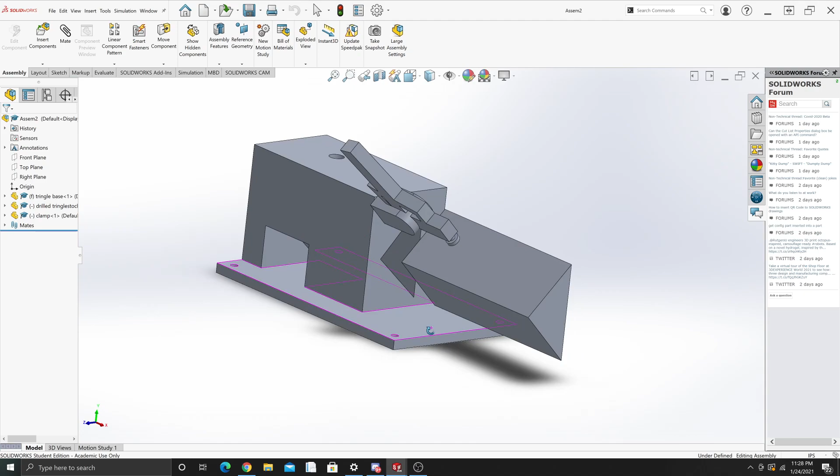My computer's gonna run a little slow, but in this one, basically the goal is to drill a hole at an angle, but also perpendicular to this backside. So for this fixture, it's a slide in.

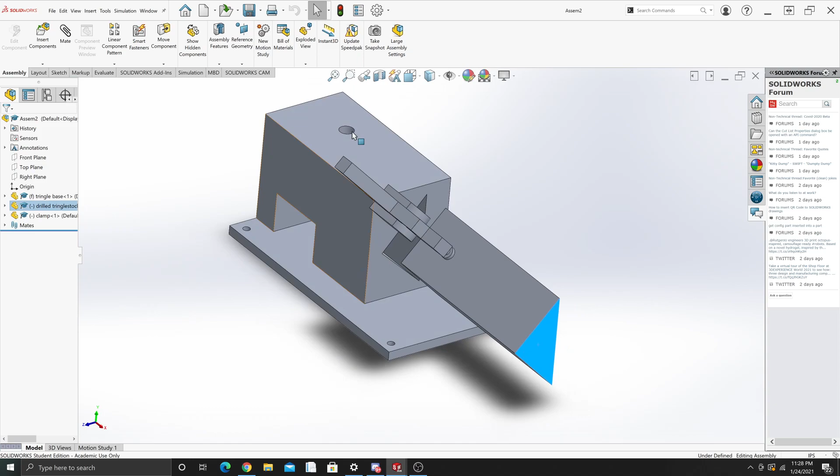My computer's really freezy right now, but it slides in, and then basically you have a pilot hole that guides it in to drill because it's at an angle, so it's going to deflect. So that helps prevent it from deflecting.

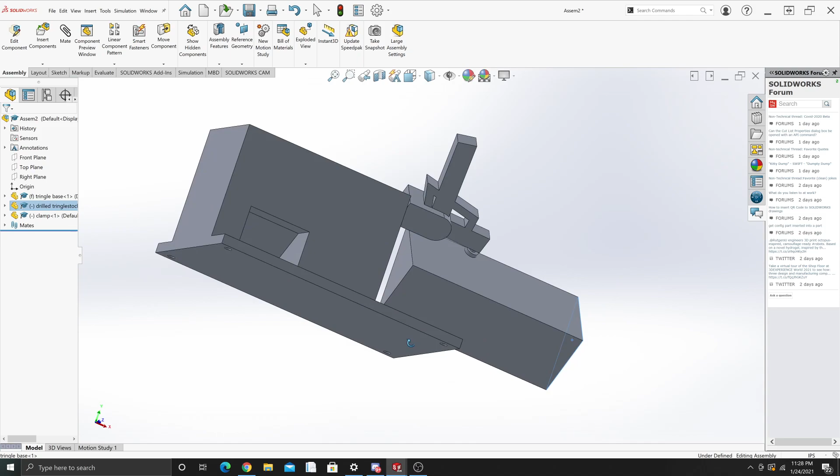And then once it gets in there, you clamp down the clamp. I just kind of have a generic clamp throughout these, so not the prettiest, but it works for the idea. And then I also have a slot to basically allow the excess metal to be able to work its way out. So that is the first fixture.

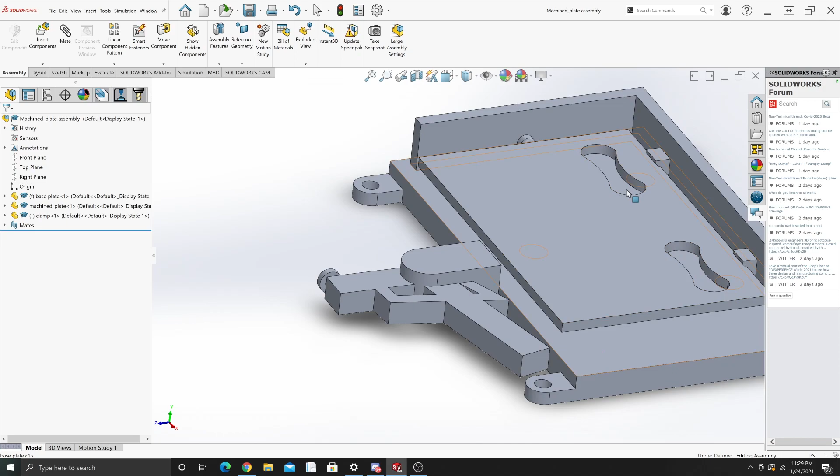So second fixture, once again, just a generic clamp to kind of give the idea of a clamping mechanism. But this plate needs two slots that are CNC'd. I'm assuming CNC'd. It's possible to also bring this in as a robot and kind of slide it into place.

So if you look, there's three little standoffs underneath there. That'll help balance it out. I added it near where it's drilling, so when it gets pressed down, the forces basically kind of work with the little clamping, or the placers.

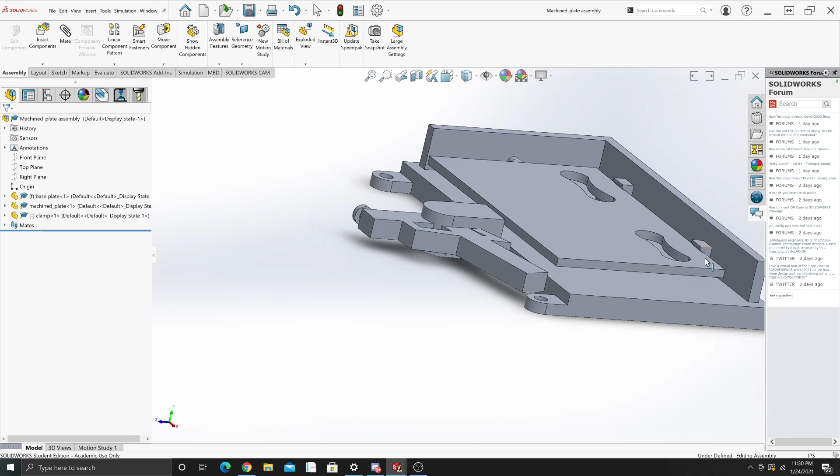I don't know what you'd call them, the bumpers I guess. And so there's the three bumpers on the bottom, and then there's the two bumpers on the side, and it has a little kind of like a little slot to help guide it in, so it's not like rattling around and bumping up.

But this, if it kind of snags something when it retracts on the mill, there's a third little bumper just to kind of help guide that into place at that angle, and then a clamp to clamp it down.

Potentially you could have a clamp on the other side to really ensure that it doesn't move in that direction too, if it's not grippy enough. So that is the second fixture.

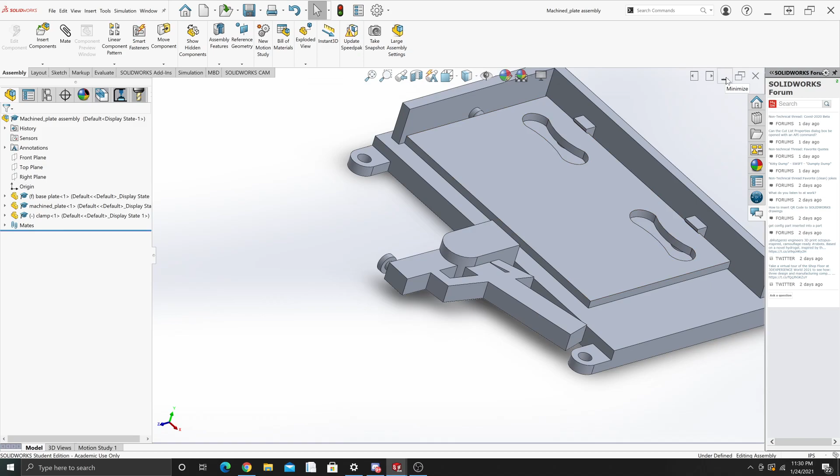And then if we go to the third fixture, first I'm going to pull up a picture. So basically slotting a hole through the middle and then kind of adding this outer ring on the outside. I guess maybe if you wanted to put like a bushing or something on, or not a bushing, rubber grommet on the flange.

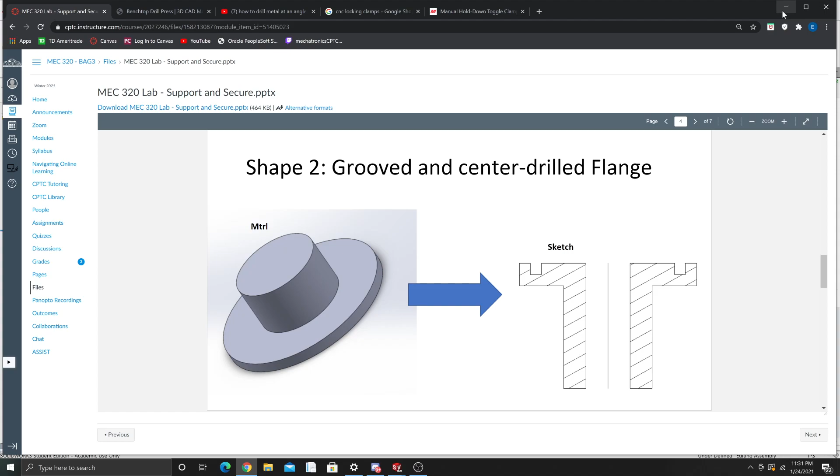O-ring, that's the word I was looking for. So if you want to put an O-ring, the idea I had here was basically to have the lathe kind of like a normal lathe would be, where it has the three clamps and then the electric motor, still kind of going with the same idea.

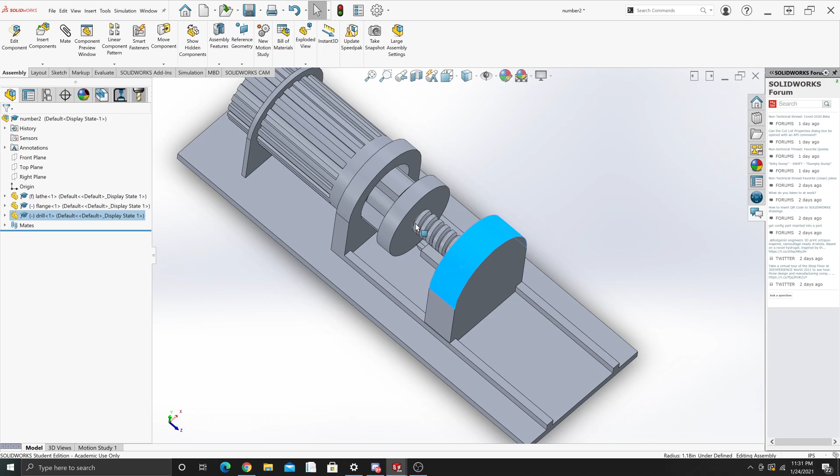Basically you work in, so the part's spinning and then it drills out the hole as you work this piece in. It's not really moving around. My computer's not liking this load.

And so that outer piece, that little tool, kind of the same idea as when you're using a lathe, where you work that tool in, and basically that'll create that outer ring for that bushing or O-ring or whatever else is going in place in that flange.

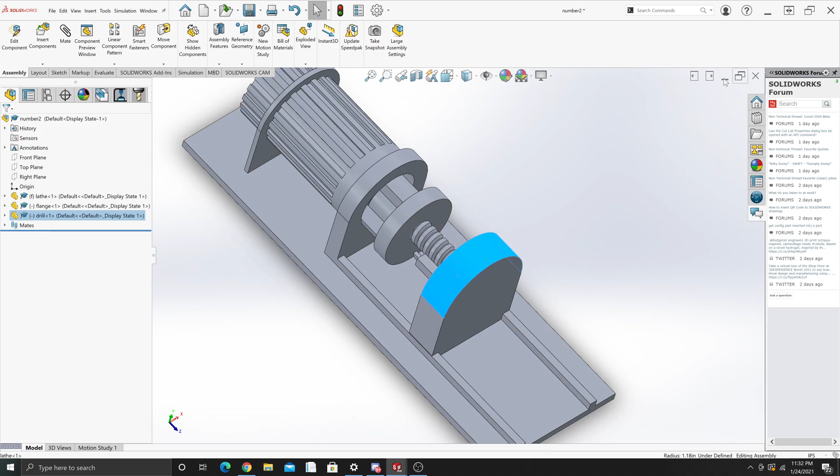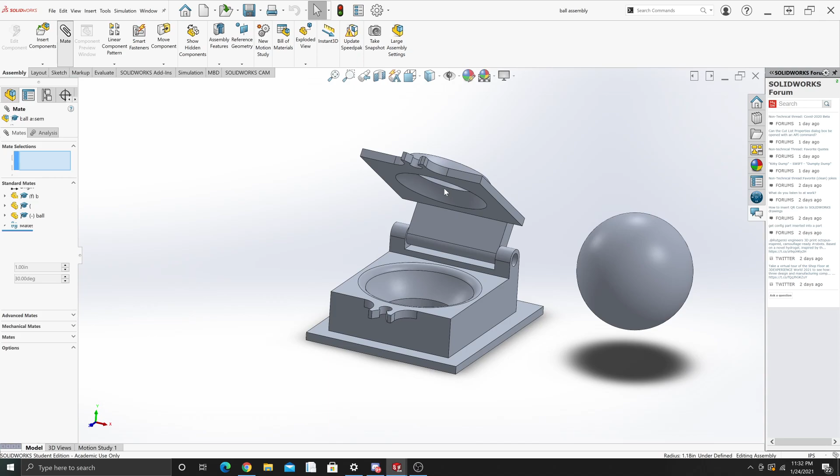You wait for it to load. So for this one, I do not have the ball mated in there yet, but basically the idea is that the ball, we're freezing up again, but the ball gets placed in there, and then that top crown clamps down. So will it let me mate it?

Might be asking for a bit much, but so that gets placed down, and then there's going to be a bolt that cinches it down, and then like an upper, kind of like an O-ring almost, to allow for a little bit of play and give it a little extra grip, so when that hole comes drilling through the top, the ball doesn't go spinning around.

So yeah, for this one the goal is basically to center drill a hole and then straight down, so there's not going to be really any deflection when you're using a mill bit. It has a flat tip on it, so it won't bounce around. So as long as you get relatively centered, it'll stay centered and be able to drill through.

So the goal is just basically to make sure the ball's not spinning, and then it can accurately do it precisely every time.

For the depth, the depth's kind of placed on the drill itself, so once you have an accurate way of controlling it up and down, depending on the type of drill, it depends on if you put like a bump stop in the actual plate or hardware itself, but I assume that it's automated to some extent and it has something to control the depth itself on the drill.

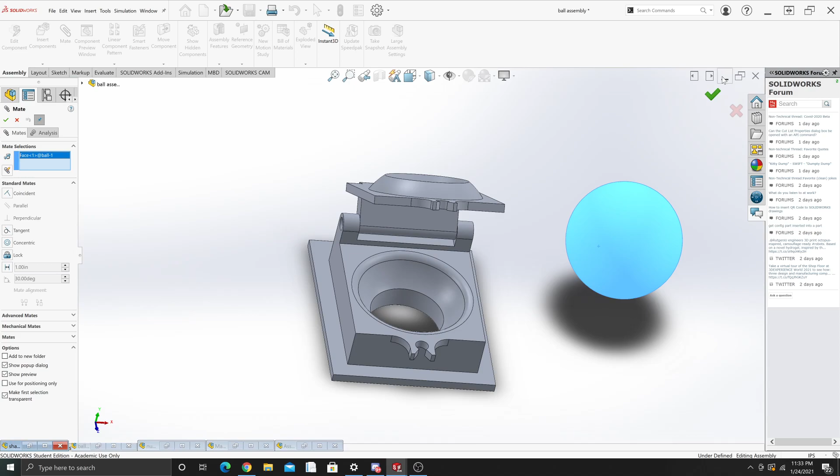We are going to try to work our way to the last part. So for this last part, basically a drill, like an end mill bit's going to come by and do a straight line across. So the main goal on this is to have it not wiggle around and have something to basically counteract the force that the drill is coming down on, because it's a thin layer right there.

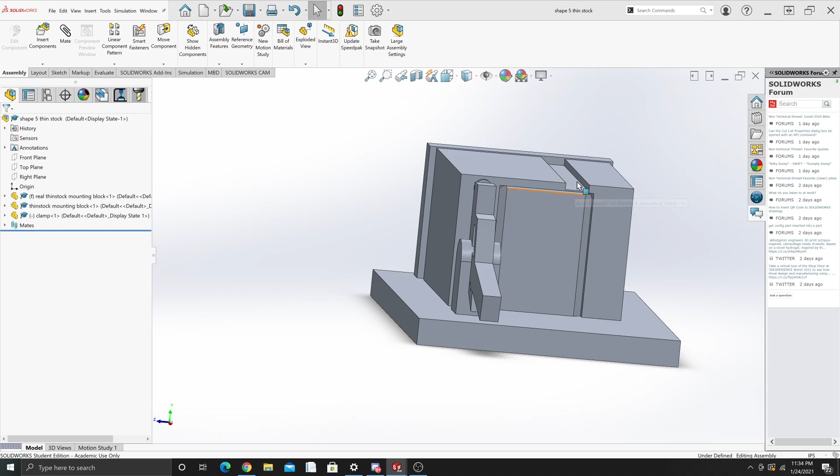So I created a block so that's able to push down, and then also since it is a block, you're able to maneuver if it goes left or right more.

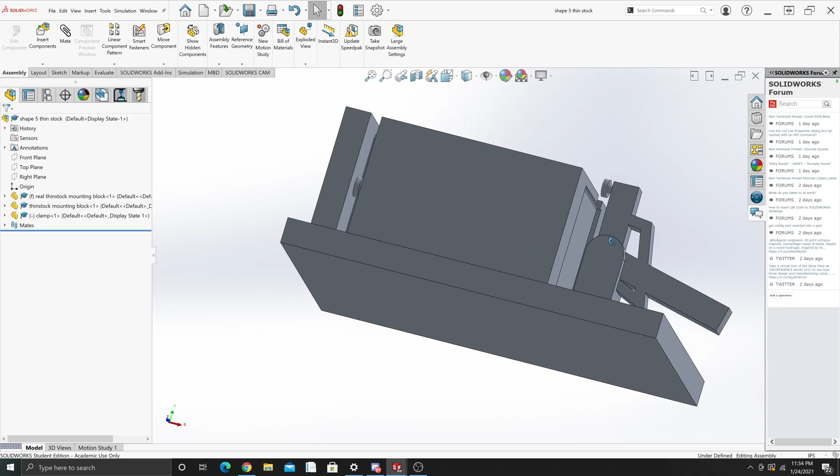This clamp helps just kind of cinch it into place so that things aren't really moving around. It's pretty sturdy, it's got its points of contact, and then little bumpers in the back. So yep, basically the drill comes down and works its way across. And that is this week's lab for fixtures and workholding.